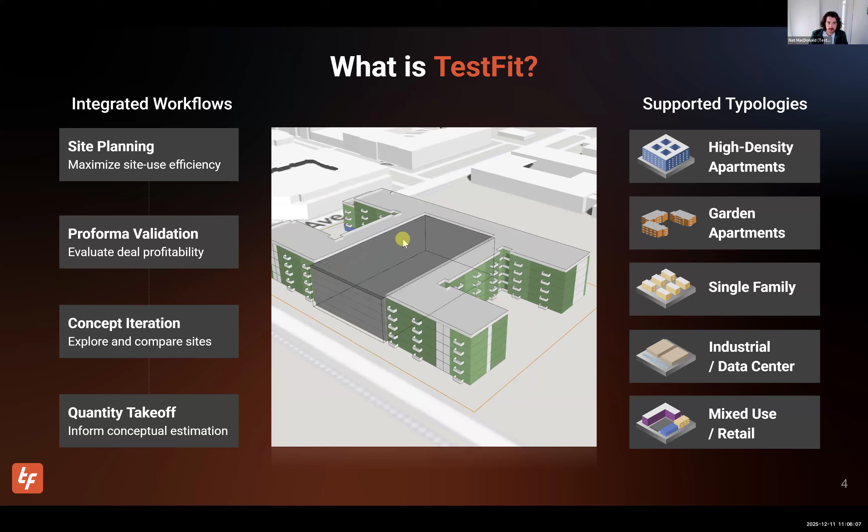The really exciting thing about TestFit is how much it's been adopted in the industry. We have over 32,000 users in TestFit this year that evaluated over 90,000 deals. We have a bunch of other statistics: 13.5 million parking stalls, that's a lot of parking you did not have to count or design yourself, TestFit did that for you. We're very proud, as much as we dislike parking at times, we're also pretty proud of that number. Over 9.6 million dwelling units, that's pretty amazing. And a lot of industrial, a lot of massing, and a lot of data centers, which is one of our new markets. We're excited to see so much of that built out.

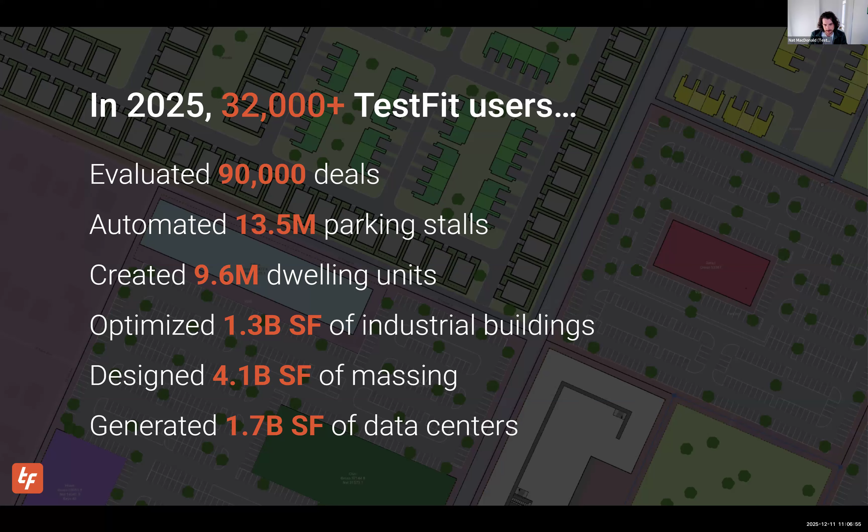So Jack, do you want to start us off with site analysis? Yeah, absolutely. So when you're getting into TestFit, a lot of what we automate in the beginning is bringing in data sources to help you get up and running. One of the things we've had for a while is parcels for all of the United States, so our North American friends can go in and click a site and automatically define it. Now our friends in Canada can get more accurate site selection because we've expanded that data source into Canada.

So very simple to click and go. You also have the opportunity to draw things in manually or type in your metes and bounds.

Along with that is utility data. Data centers is one of our newer markets, but also when you're looking at large scale single family, garden style, and going out into a suburban or rural area, these large utilities can get in the way. So we integrated with a global data source that pulls in major transmission lines for electricity, major pipelines for water, gas, natural gas, and similar things, to help you identify issues on the site as quickly as possible. You can then go ahead and put in an easement, or decide if you really want to move it depending on your site.

One of the other things we've added is parking requirements. We've had zoning data in TestFit for a while, and part of that resource now includes parking requirements for certain jurisdictions across the country, both in the US and Canada. As you're deciding how much parking goes on the site, you can look at your requirements and see which is more stringent, and solve with that live.

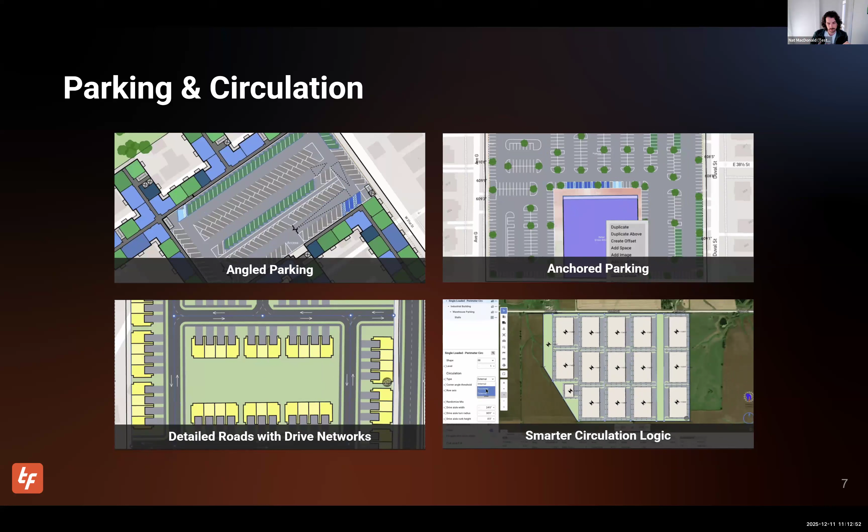All right, next, this is me again. Generative design. We launched generative design in 2024, and it's become one of the fastest ways to explore options in TestFit and find the most optimum solves the fastest. So instead of selecting a single preset, changing a few parameters to find, you think, oh, if I change this drive aisle width, I should get a larger, more optimum site. Now generative design will do that for you.

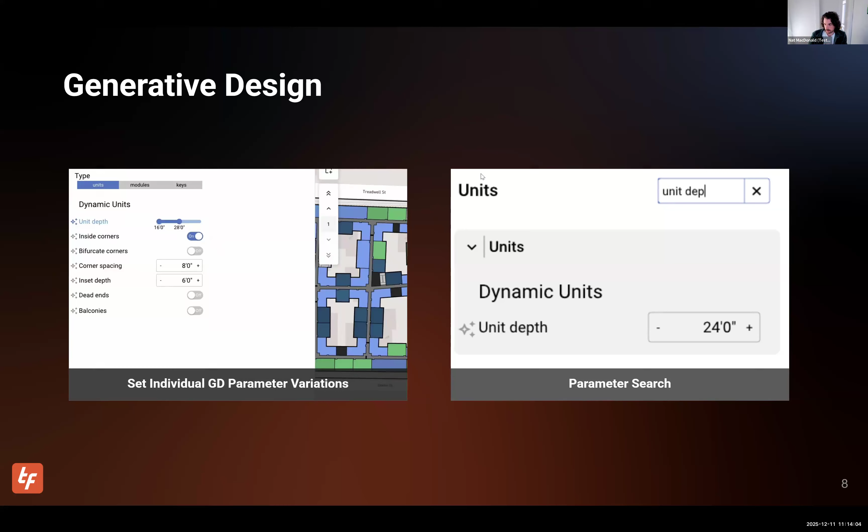All right, back to Jack. We love retail. For those who don't know, I have a background in retail. It's one of my favorite asset classes. And we've been pushing a lot more out for retail developers within TestFit. One of the biggest things we've done this year is add a lot of functionality for drive-throughs.

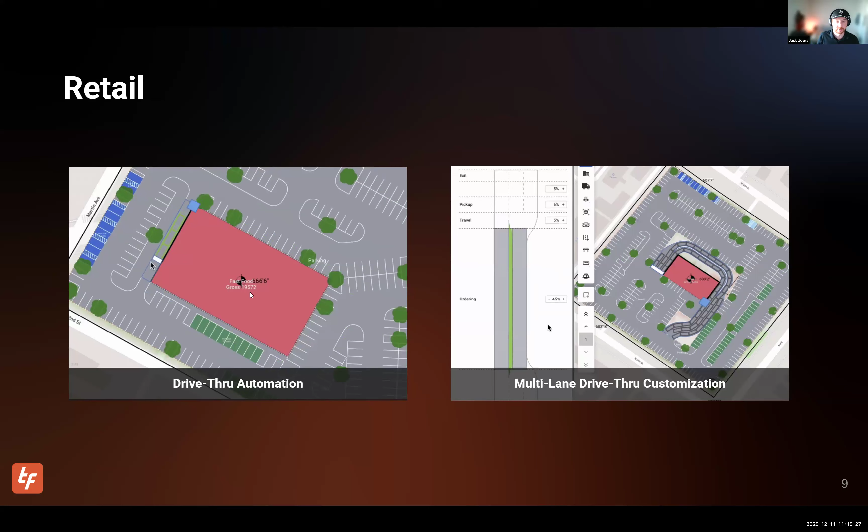So more to come with retail as well, but very excited to get these out there, and we already have some drive-through folks building with it, which is great.

So we released a lot for multifamily this year. We gave you more customization around unit mixes within a building. Sometimes you might want a different floor plan on different floors of a multifamily building. You can now use multiple unit mixes in a single building, and for podiums or penthouses, you really get a lot of flexibility there.

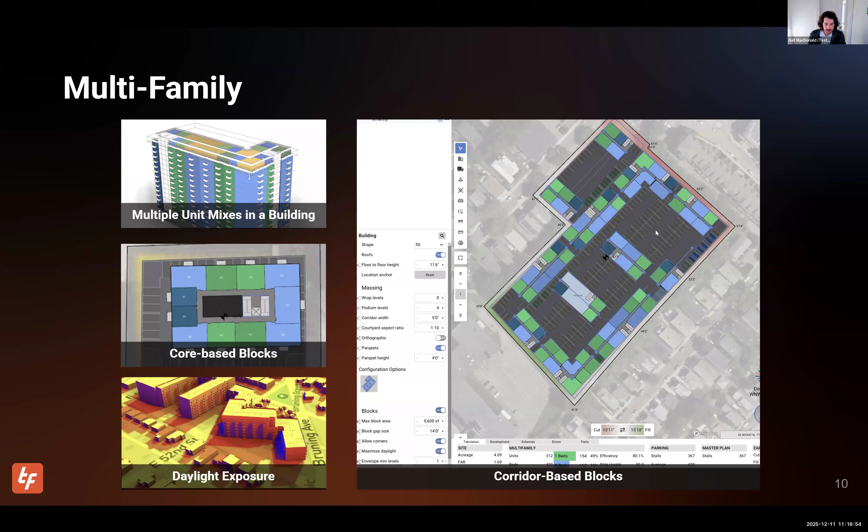On the right, you can see the longer workflow, where you basically determine the maximum area of a block, so 10,000 square feet for one floor. It will size that block and allow you to manipulate those in the site, as well as pull in daylight exposure to optimize those building heights. So buildings in the back that would normally get shadowed will be taller than the buildings in the front.

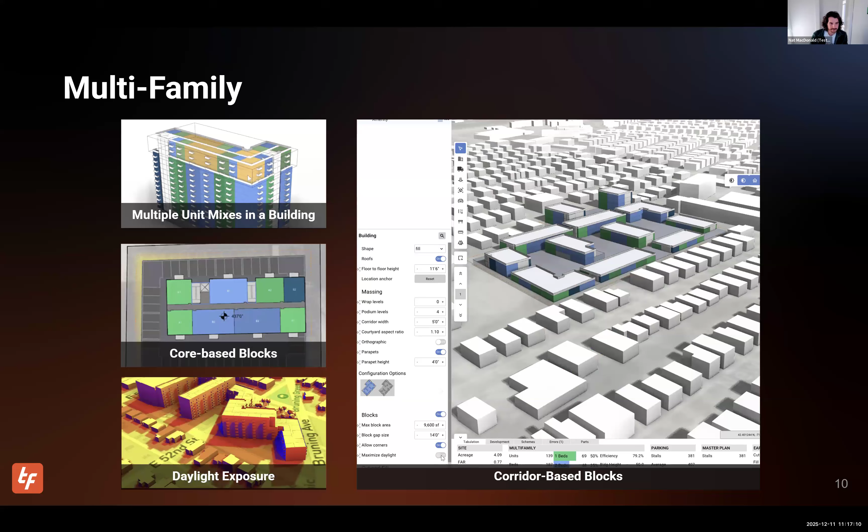Back to you, Jack. Thanks, Nat. Industrial and data centers: industrial has been one of our longer term solvers essentially in TestFit. We've done a big update on it this year. Now you can create a full library of different prototype buildings to match your exact standard.

So you've always been able to craft prototypical buildings, but now we're really focusing on allowing a mix of those. Basically saying, hey, I want a single docked building and a cross docked building on the same site, but I have ranges for both of them. Now TestFit will allow you to create those standards, but also solve with them on your site. That's also functionality we added to our data center solver as well, which includes data hall components and adding auxiliary uses to the buildings.

Being able to add those in, and now with the building editor, add a lot more complexity to those. I've seen some truly wild buildings already being built within there.

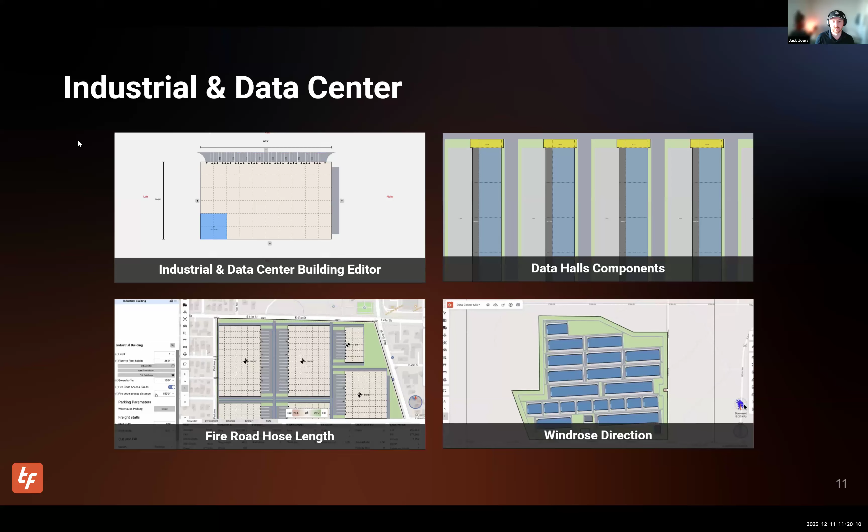So this year we've been focusing on making TestFit easier and more intuitive to use. We've made a lot of improvements in this regard. So here's a few—first, we have a new site locking experience.

Now you can see everything in data maps and Urban Planner before you select a site. This means you can browse all your site constraints, test with massing, preview generative design presets before you commit to selecting a site. And during site creation in TestFit, you can now search for your location by inputting your assessor parcel number, so you can quickly pinpoint your exact parcels. This makes site selection faster, more accurate, and super quick.

You can also now copy and paste sites, layers, and regions. You can do this between sites, and also across files, which is particularly useful so you can avoid repetitive work and speed up your workflow for large-scale master plans.

You can further streamline your work by using the classic keyboard shortcuts—Control C, Control V, all the faves.

You can now define your building setbacks separately from landscape setbacks. This gives you more control over buildable envelopes and your open space requirements.

You can place trees automatically, and we added the ability to adjust the density and scale of the trees on your site. And lastly, we implemented autosave and version history for your deals.

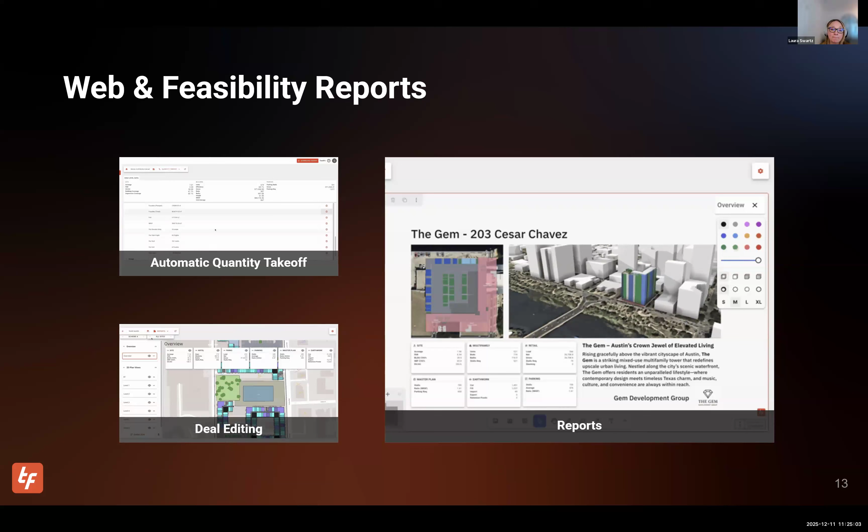You can also compare schemes and really customize your report to show the information you want, and then share it with stakeholders, whether for a presentation, sharing a link, or downloading a PDF and sharing that via email. So a lot more functionality that we're excited to have at our customers' fingertips.

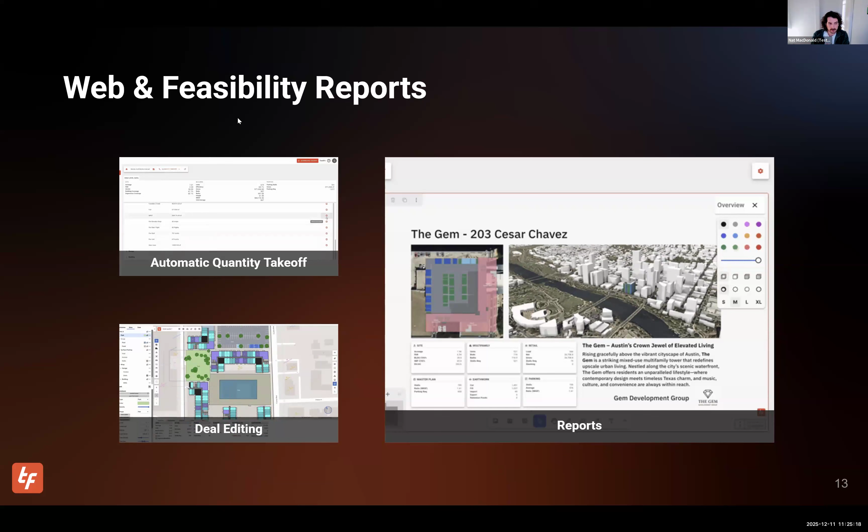Yeah, all this stuff is really great, Laura. In a few minutes we'll demo the reports functionality because we are very excited about that. So what's next?

TestFit is absolutely driven by customer feedback. We love it when you guys say, this thing is amazing, and what if it could do this?

I think Ted in the Q&A asked, TestFit's amazing at feasibility, what about searching for a site? A lot of that feedback is valid, and we just have to choose what we work on. So that's totally a possibility. If you have strong feelings on that, Ted, or anyone else, about a site search tool, please reach out to us. We would love to hear about that.

But in terms of what we have planned right now, TestFit is turning 10 come April. So we're going to work on a lot of really exciting things.

One thing we want to expand on is our pro forma capability. As real estate developers, a lot of you have your Excel spreadsheet. It works, you trust it. You can always go back to that and know that the numbers you put in are what you base your decision on a deal for.

We want to bring that into TestFit. We want you to link your TestFit data into your pro forma and do whatever calculations you want, all while updating in real time from the TestFit model. So we're very excited about that pro forma work.

Now onto the exciting part of demoing some of this stuff. I know some people have been asking questions in the Q&A, and a few of those have been answered. Feel free to toss more in there. But Laura or Jack, do you want to kick us off with a demo? Go, Laura, go.

Sounds good, I'll go ahead and share my screen.

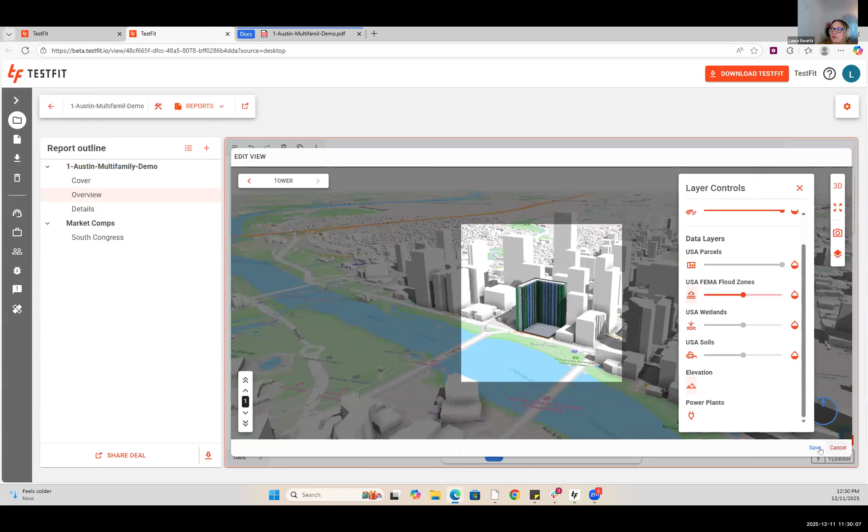So you can add custom named sheets. You'll notice these views are essentially viewports - they launch with the default template, but we can also make edits to the view within that viewport. Once we have a nice view that we want, we can save that, so we get the opportunity to really curate what you show to your stakeholders and how you're making that analysis.

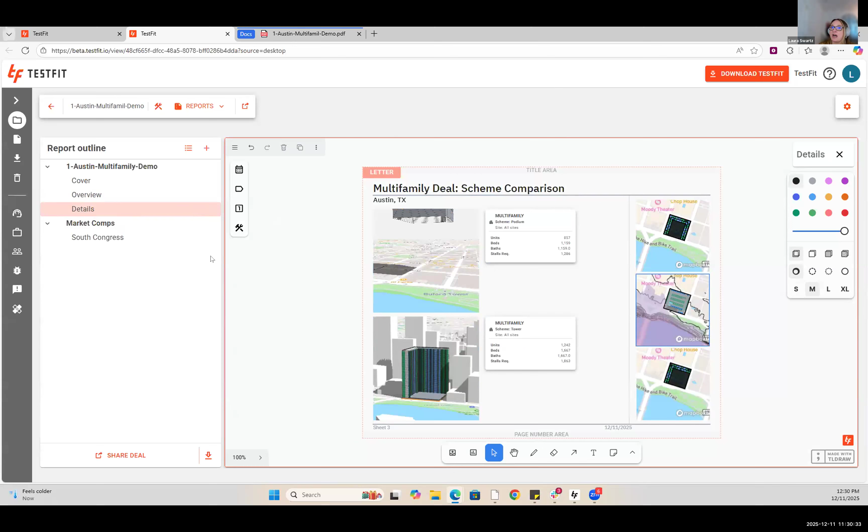This is an example of a deal that's proposed using those live deal stat cards reporting data outputs from the model. And this is an example of how you can use those outputs as a scheme comparison between different schemes, so you can really start to curate what you show and how you use your decision-making process to determine what deal to go with, or if you do not decide to go with the deal. Down here, you also have the ability to share a link to the deal or download the deal.

And just a little teaser here, we are moving towards custom templates. So right now we do have default, but this functionality will continue to increase and become more customizable.

And Laura, what's the easiest way for someone to share that report with someone? Absolutely, so you can share the deal here, either type in an address or just share the link and copy that link, then either email it or text it to share that link that way. Awesome, thanks for showing that off.

Absolutely. Jack, you want to show off some of the circulation improvements we have in industrial, townhomes, low density garden, that kind of thing?

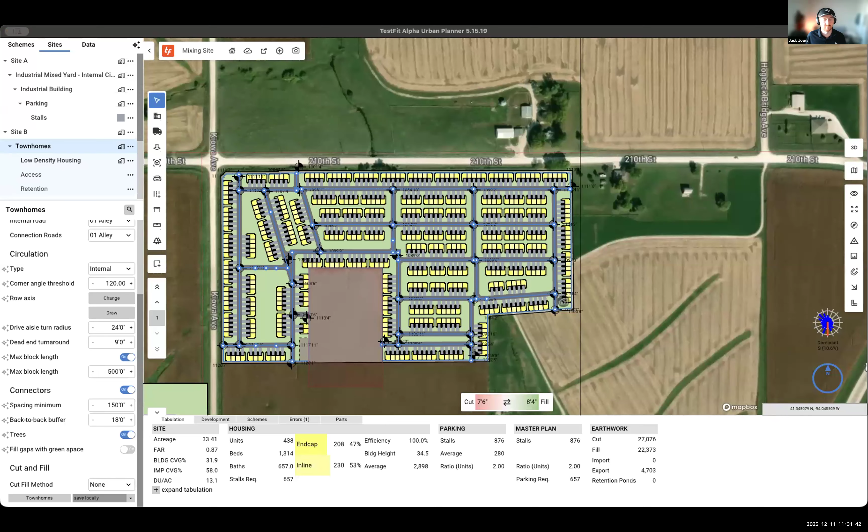Absolutely. So this is our standard circulation that we've had in TestFit for a while. Essentially this looks at having an internal circulation road, basically having a ring road that goes around to make sure we have the ability to traverse the entire site, and then we start to connect it in between. Now we have a couple different options to switch this into perimeter - this is super helpful if you want to have just a fully external ring road with no housing or any sort of massing between that and your parcel edge, and then have all your buildings internal.

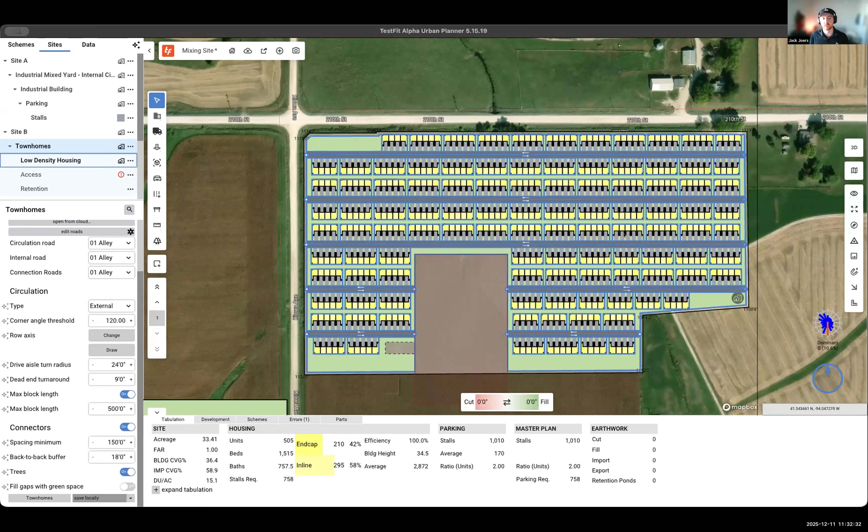The other option, especially on something like this where you have maybe a road that comes all the way around your site - for some of those infill sites, we can switch to an external road. That basically looks at creating drives all the way through. This is a large site for this, but essentially having outside of your site, or external circulation in there. So now you can switch between all of those.

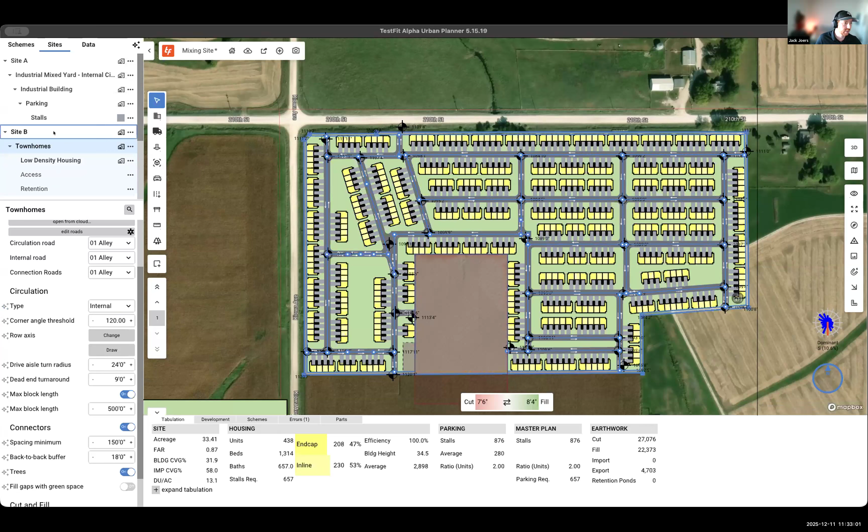You can also have TestFit run those with the different variations in generative design, so you can try and see the maximum density you can get across the board depending on those different sites. The fun part is this works for nearly all of our different configurators - townhomes, and it'll also work for our gardens. If I come up here and go into garden real quick, it'll work here as well to switch between all of those different types of circulation patterns.

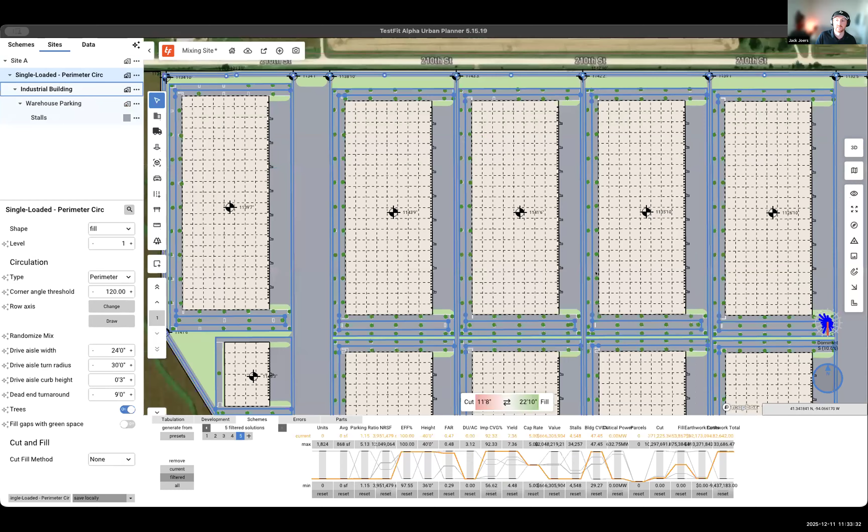And then even at our larger scale, let me switch into another scheme here real quick - it works for our industrial data center folks as well. This would be looking at like a perimeter drive where you have that maybe security road going around the site, so you can maximize the internal space for your site. Or you can switch it back to internal, have some different configurations there, or look at external as well. So a lot of different variations we can do within the software now for circulation.